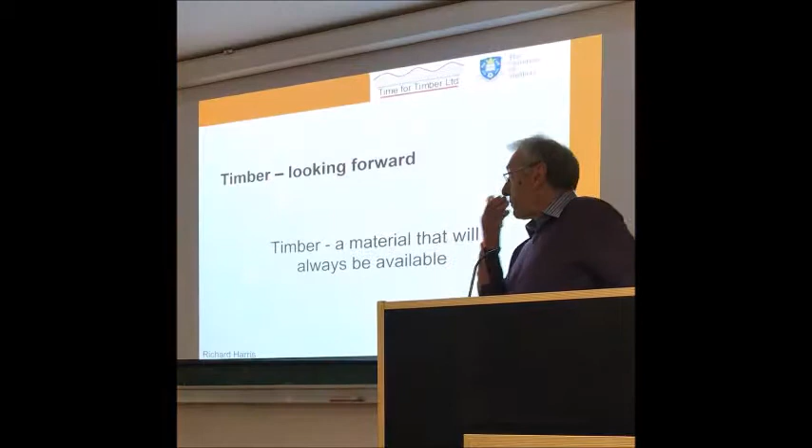So Wen-Shao asked me to put in a few slides to say why timber is such a significant material in construction at this time. I feel it speaks for itself, but Wen-Shao says we must keep reminding people of how wonderful timber is. The first thing I would say is that what's been so good, especially about the last 10 or 15 years of my working life, is that timber is a material that's modern and developing.

If you go back 20, 30 years, people used to think timber was an old-fashioned material to work with, something we used to use in the past. But with so many new products coming into the industry, and because timber is such a sustainable material, it's very much the material of the future.

You'll always hear people saying, well, what do we do when we have used up all the trees? But of course we don't use up all the trees. There's plenty of room to plant more trees. This country is only 10% forested, as compared with Germany that is 35% forested. So even in this country we could plant a lot more trees, and the same is true of other countries.

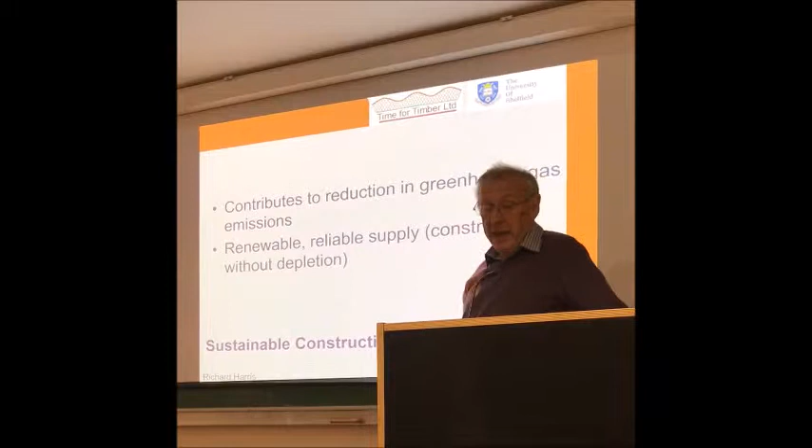So it's a material that is sustainable, because when used from certified sustainable sources, every tree that's taken out of the forest will be replaced by at least one other. So it's a material that will always be available, and being available, it's a material that helps us cut greenhouse gas emissions, because we're not producing huge amounts of carbon dioxide in the manufacturing process.

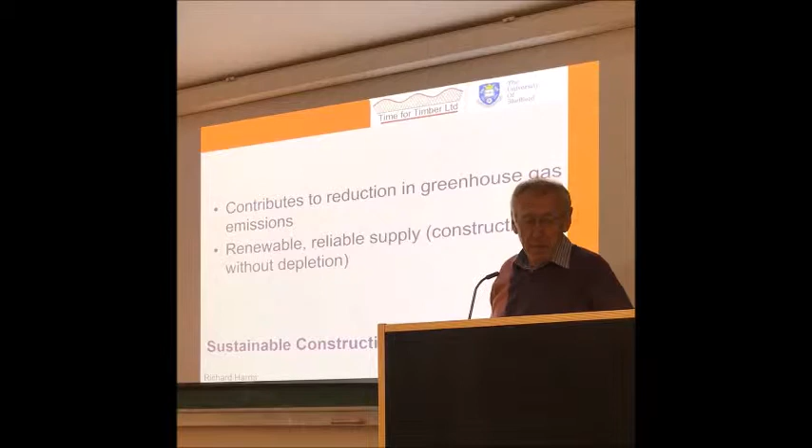There's obviously some emissions in sawing and preparing timber, but as compared with heating up limestone and clay to make concrete, or forging steel out of ore, the emissions are tiny. But even more than that, because it's coming from renewable resources, when working with responsibly sourced timber, we're constructing without depleting the Earth's resources. So we've got the benefit of reduced greenhouse gas emissions, but in addition, we're not depleting what we have.

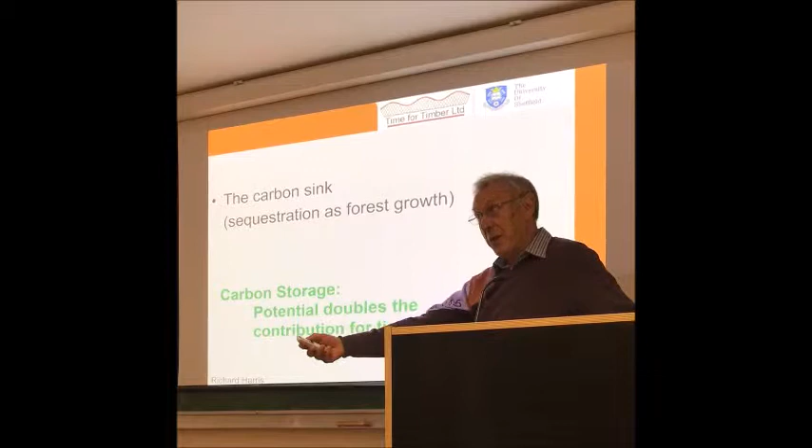So from the point of view of greenhouse gas emissions, there's a double potential with timber. We know that for every tree that we take out to use in construction, if we replace that with another tree, so we create space in the forest and replant, then that tree will continue to take carbon dioxide from the atmosphere and hold it within the forest.

But the tree that we've taken out, we can use in the building, and that in itself becomes a store of carbon, holding the carbon dioxide that it's taken from the atmosphere in its growth, so that we have a double contribution of benefit in terms of carbon dioxide. And it's very simple.

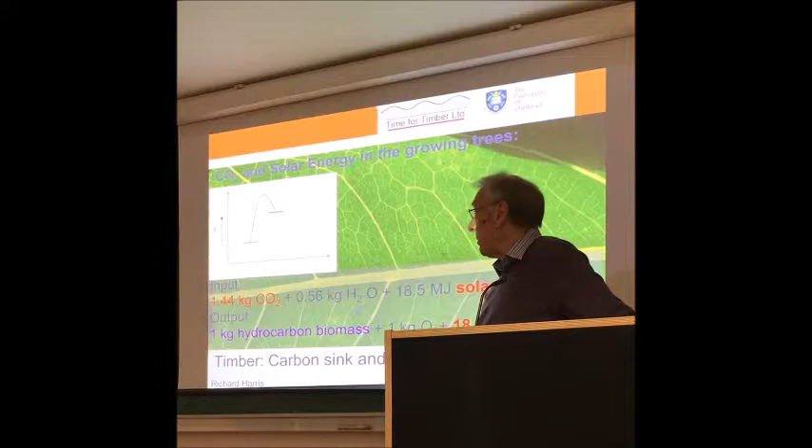In growing trees, the photosynthesis enables carbon dioxide from the atmosphere to be combined with water from the ground with an input of energy from the sun, and we get a complex hydrocarbon, and we release oxygen into the atmosphere, and we have a potential of energy held within the wood as well.

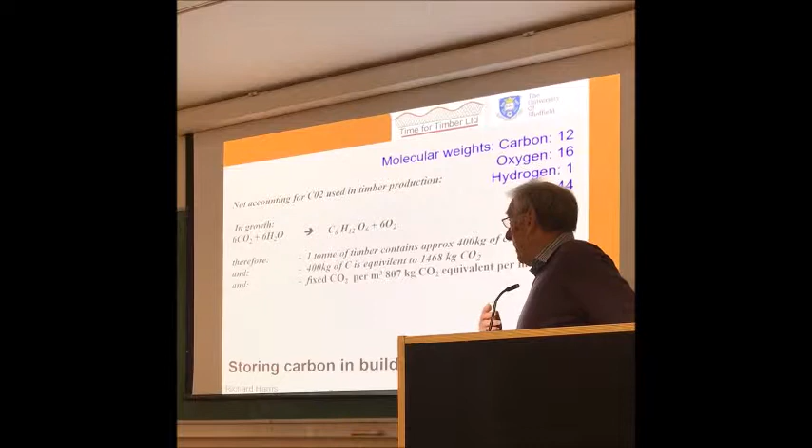I've given these slides to Wen-Shao, so if you want - it's so often quoted that carbon dioxide and water give that complex hydrocarbon and oxygen. This is a simplified expression, but it basically covers the process, and it's frequently quoted that 1 ton of timber fixes 800 kilograms of carbon dioxide.

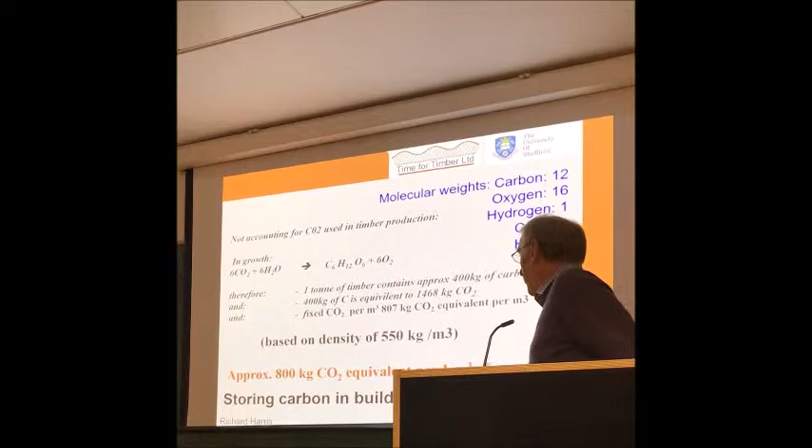But the way to get these figures is - sorry, 1 cubic meter of wood, which is around half a ton of wood, fixes 800 kilograms of carbon dioxide. It's simply a question of balancing this equation with the molecular weights, and you get that answer. It's so frequently quoted, but that's some numbers you can put to it.

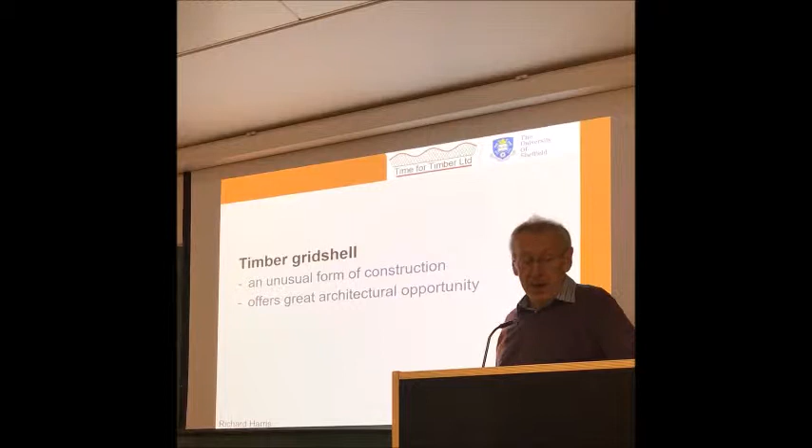And the rest of the lecture, I'm going to talk about a very particular use of wood, which is the timber gridshell. This is an unusual form of construction, but it's a form of construction that can offer you huge creative opportunity architecturally.

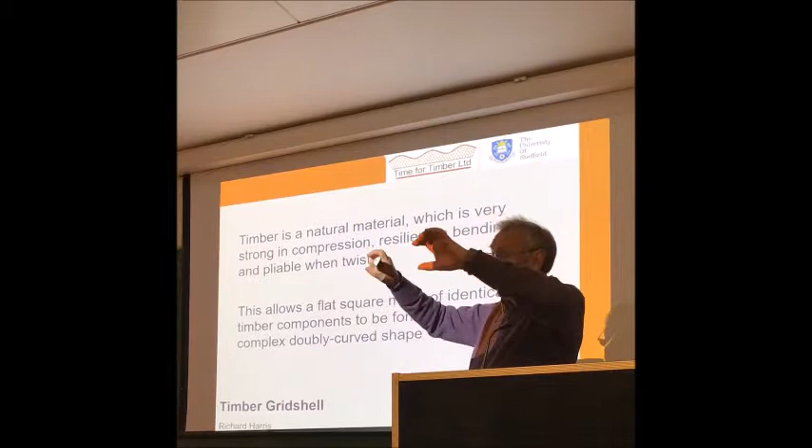Timber's a natural material. What are the properties of timber? It's strong in compression along its length, and resilient in bending, but it's very predictable, and it carries bending loads very effectively.

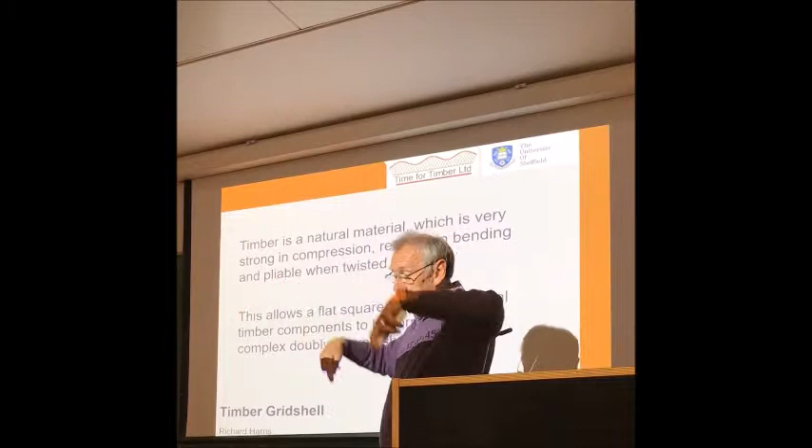But for the timber gridshell, another property that's needed is the fact that when you twist wood, it's actually very weak when you twist it. For timber gridshell construction that's a real opportunity, because it enables you to lay the wood out flat on the ground. If you take one layer and place another layer over the top of it, and hold it in place at the nodes so that it doesn't lose its geometric shape relative to one another, but allow the nodes to rotate, then you can manipulate that flat double layer of timber into a doubly curved shape.

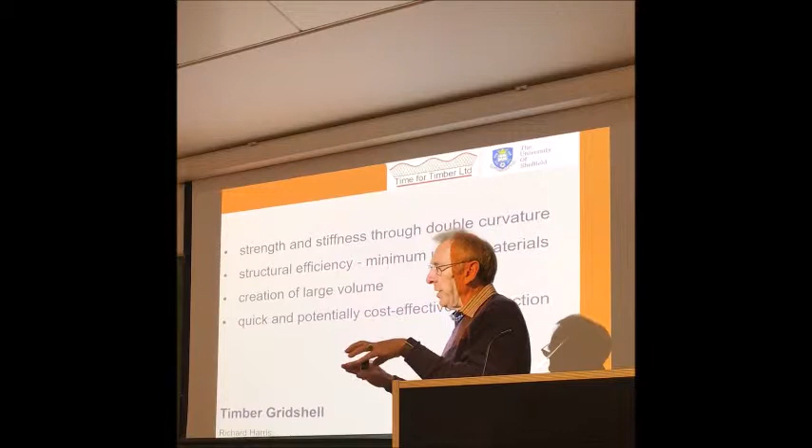Why do you do that? Well, because a doubly curved shape gives you a shell type of structure, which gives strength and stiffness. It allows forces to go through the surface of the wood rather than just work in bending, and that makes it very structurally efficient. You can create big spaces, and using this timber gridshell method, you can do that very quickly, given the complex shapes you're able to create cost effectively.

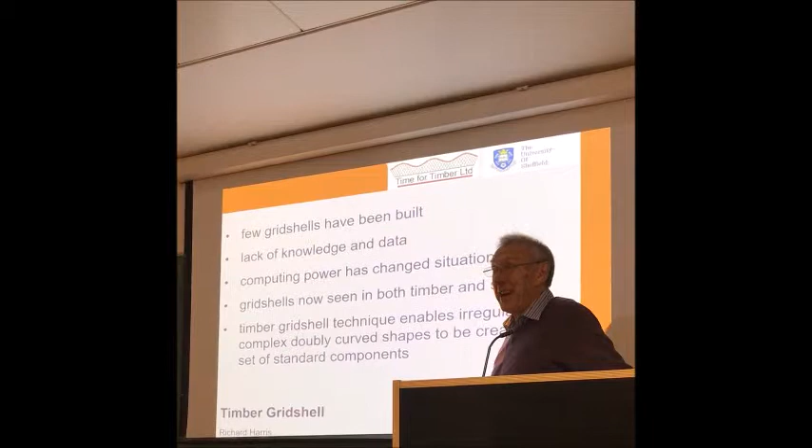Not a great number of grid shells have been built. Why is that? Well, because you have to know something about how to do it, and not so many people know about it. You'll know a lot more about it after this lecture than a lot of other people do. In the past, these structures have been difficult to analyse structurally, but now that's not such an issue because computer power is readily available.

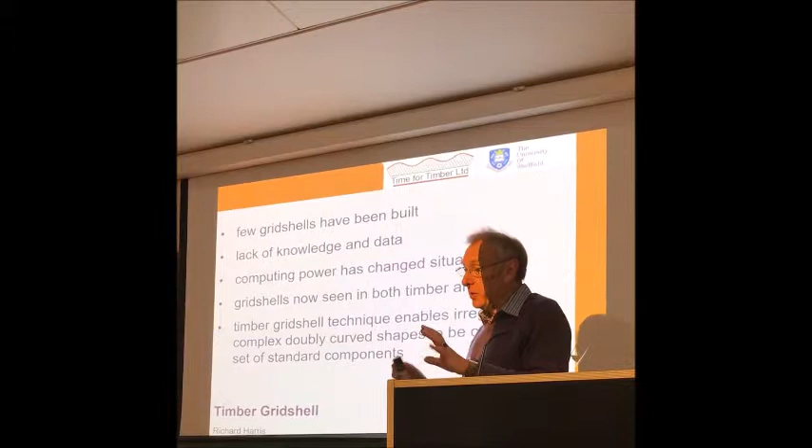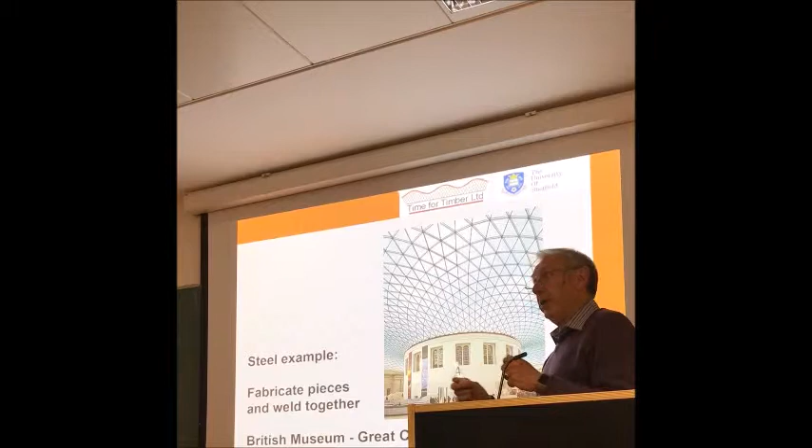So the way steel grid shells are made is to fabricate all the pieces and weld them together. You put up scaffolding and build it in situ. This proves that it can be done, but it's complex. It needs very sophisticated fabrication methods and is extremely expensive.

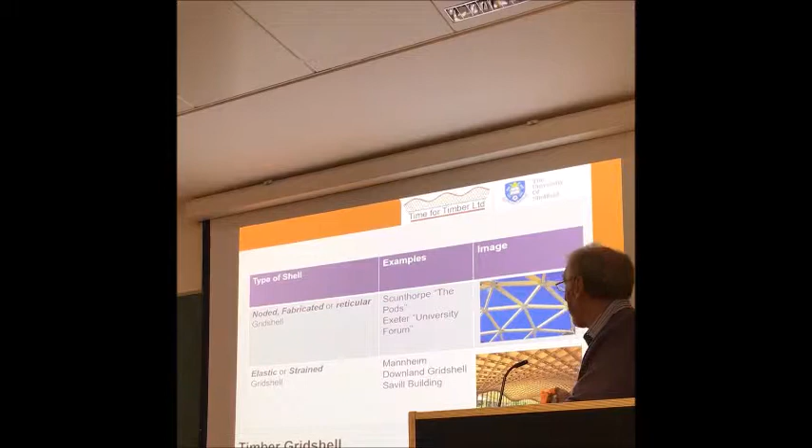The timber grid shell can be made in that way too, and you can certainly make a timber grid shell structure by putting up scaffolding and building it up node by node progressively. It can be done very easily.

This swimming pool structure in Scunthorpe was done with a minimal number of props, just progressively building the shell out into space, but it was still needed to be propped and needed to be put in piece by piece.

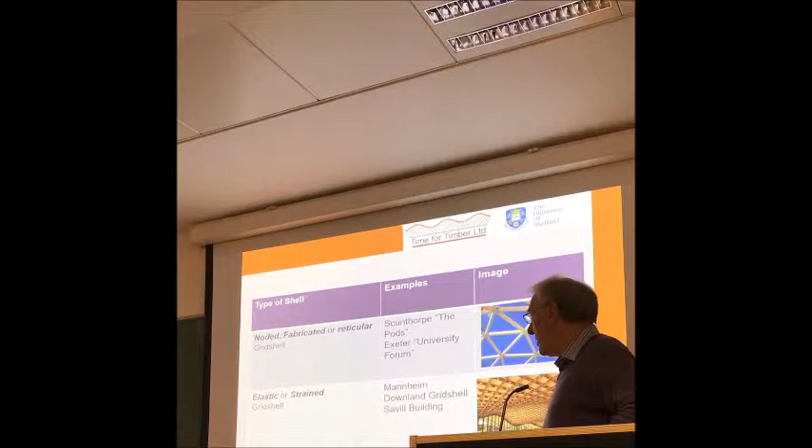What I'm presenting here today is what's often called an elastic or a strained grid shell, where you make a flat mat and then manipulate it into space. So all the pieces are standard pieces.

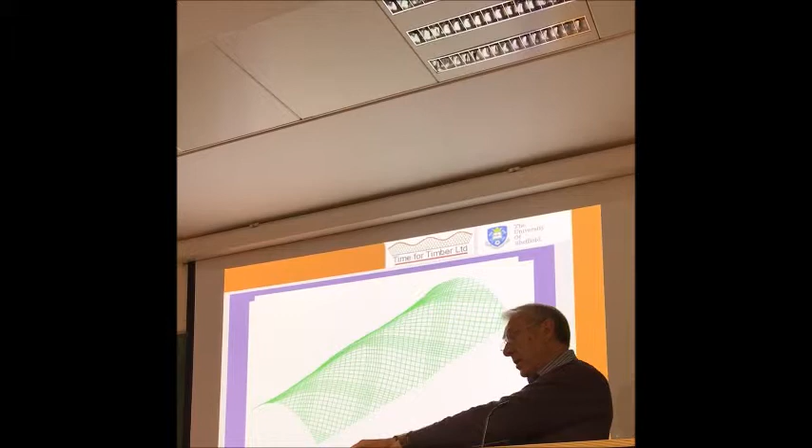Here's the flat mat, and because the nodes can rotate, it starts flat on the ground and is progressively bent into shape by changing its support. In doing that, the nodes rotate into a diamond shape from square into diamond, and the timber twists over the surface, until eventually you have a complex doubly curved shape from a set of standard components.

The first structure of any size to be built like this—there were a few preliminary structures before the Mannheim structure as prototypes—but the Mannheim Garden Festival grid shell was the first and is still the largest timber grid shell to be built.

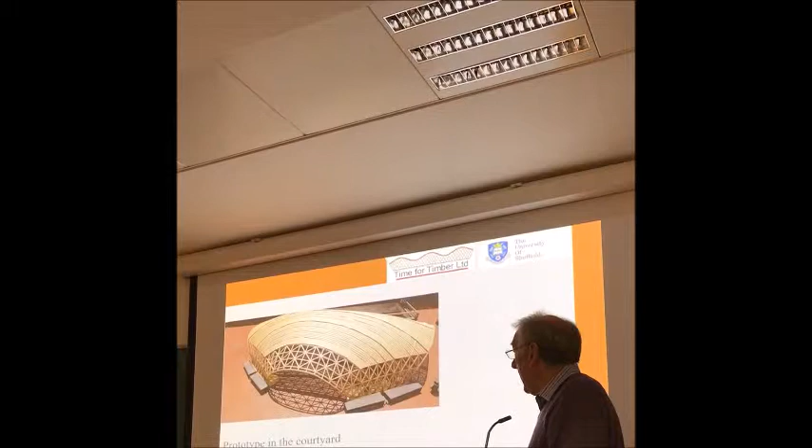After that, a number of others were built, examples given here. More recently, in the last 5 years or so, this has become more and more popular with architectural departments for making small prototype shells, because the components are very easy to prepare, and architectural departments often have a considerable amount of manpower in the form of students.

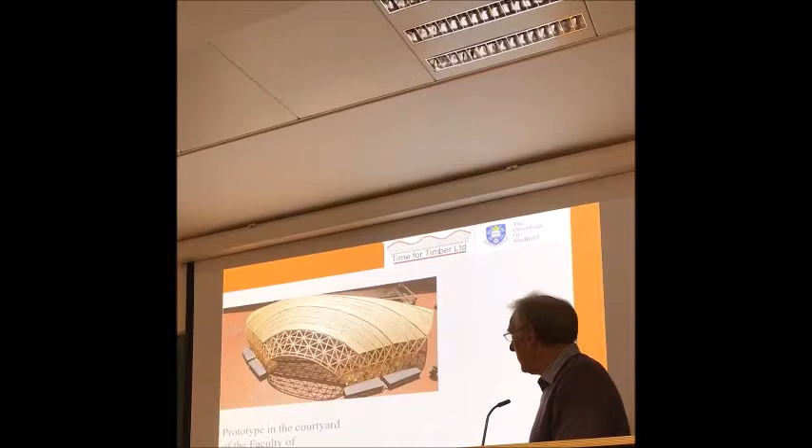This is an example from Naples, from an architecture department, where they built a small gridshell at the university. And this is another one.

When I was working at the University of Bath, Dragos Naicu from Romania made contact with other people, particularly Romanian people, but also people from Denmark, and they set up a workshop in Cluj in Romania, and they built a pavilion. As part of that project, the output was published in the World Timber Engineering Conference paper, and I just thought this was an interesting table that was in that paper.

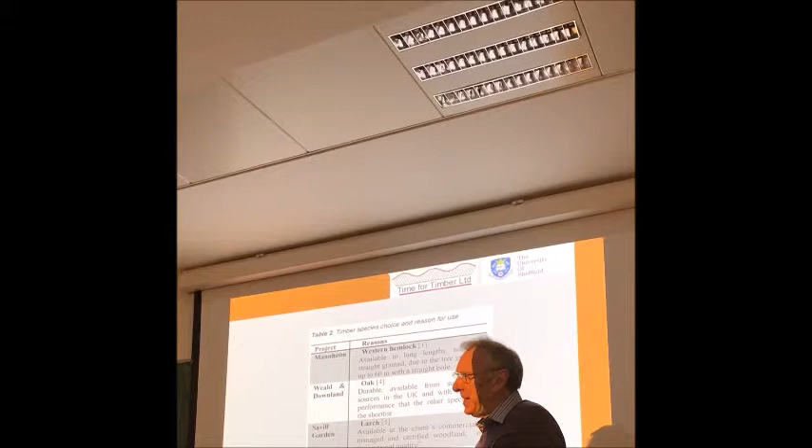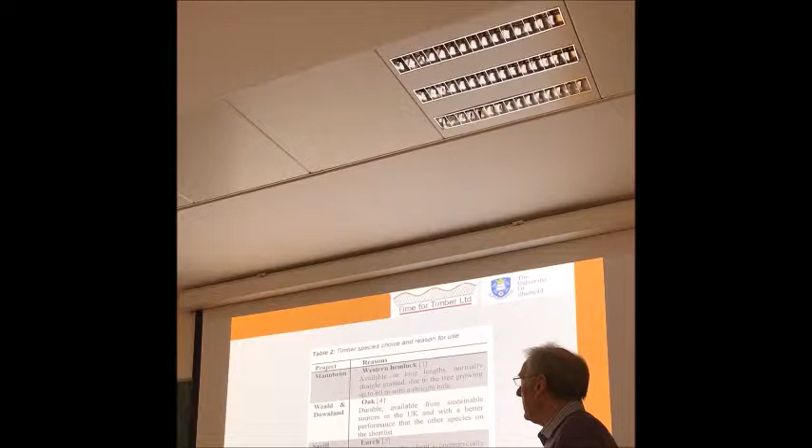Although all these structures are made of wood, there are many species of wood, and that's one of the rich things about using wood - there's more variety and variability in wood than there is in concrete and steel. In Romania, they used larch because we'd already used larch on a building in the UK which I'll be showing you more of. But previous gridshells used oak, a particularly resilient timber. And in Mannheim they used hemlock because it's very straight-grained, although I would say it's quite a brittle timber, so probably not the best for gridshells.

So the first large-scale timber structure was the Mannheim Garden Festival gridshell, designed by the German architect-engineer Frei Otto, who is probably more famous for the Munich Olympics Stadium, now used by Munich Football Club. It's recently been refurbished. But his specialist area of work was tensile structures.

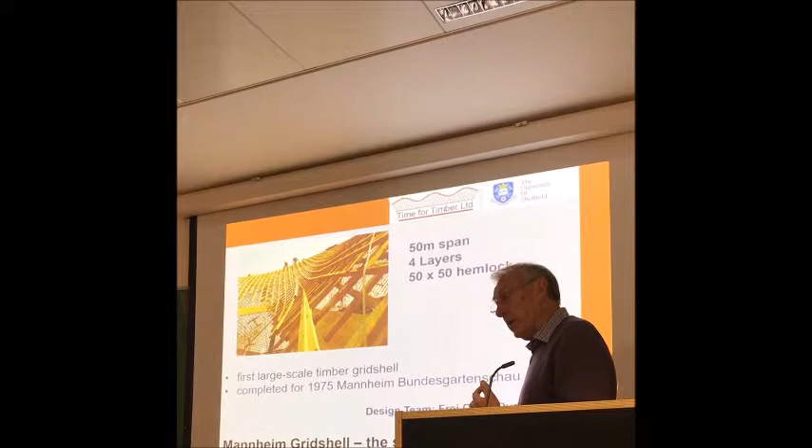He worked a lot with models. He would make models, and those would be the basis of what he'd use to win a competition, then work with engineers to turn them into real structures. This is a huge structure, and there really was nothing like it before, and there's nothing as big as it since. He searched - he started with a hanging chain model.

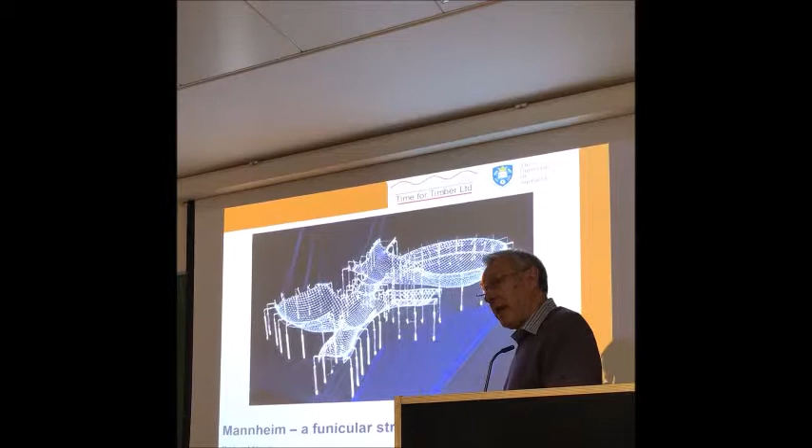If you invert a hanging chain model, it has to be completely in tension - all the members have to be completely in tension, otherwise the chain wouldn't hang. So a hanging chain model is a structure that's 100% in tension. If you invert it, you get a structure that's 100% in compression under the self-weight of the structure.

Actually for wood, the self-weight - this is a fantastic technique to use for a masonry structure, but it's a way of getting a geometry in timber that is not as vital, because timber is a lightweight material, so actually the forces on a timber structure are more significantly from wind and snow than from the self-weight of the structure. But it's an interesting way to get a structural form.

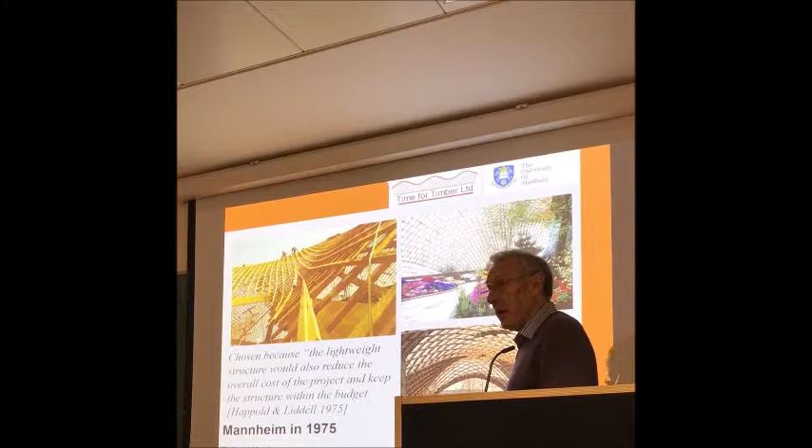He then needed to search the world for an engineer who could help him realize this structure, and he found Ted Happold, who at that time worked for Arup in London. With the team at Arup, this building was realized in 1975 - really an extraordinary building with some very interesting details, which actually derive to a large extent from the sorts of details he used on tensile structures.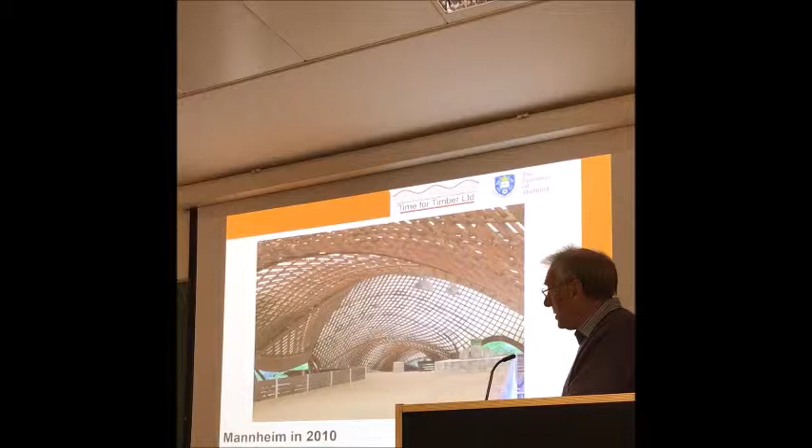And the building is still standing. It was built as a temporary structure but was so successful that it's never been taken down. As a temporary structure, the weatherproofing is not terribly great, and it has suffered deterioration over the years. But there's a strong move to refurbish this structure by engineers, particularly in Germany.

This paper for The Structural Engineer, written by Ted Happold with Ian Liddell, is a very detailed engineering account of the structure, and it is a very important paper, I would say, in the development of timber gridshells.

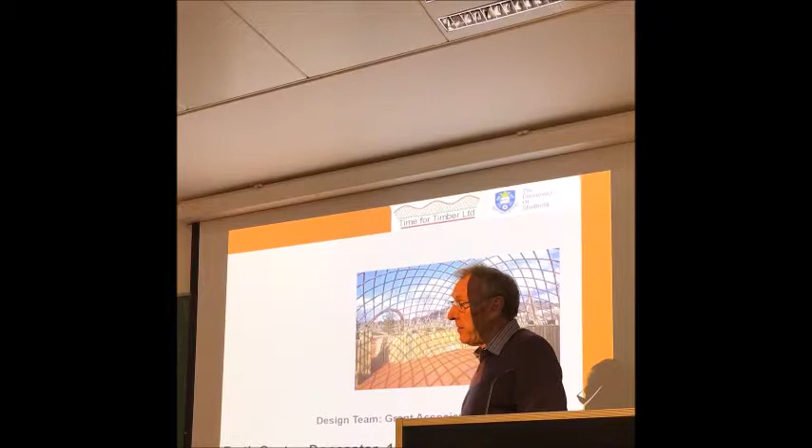Ted Happold left Arup in 1975 and started his own company called Buro Happold, in Bath, and the team he took with him were essentially the team who had worked on the Mannheim timber gridshell. So the office in Bath, the company Buro Happold, actually became the repository for all the engineering knowledge that there was on timber gridshells.

Ted Happold died in the mid-1990s, 20 years after Mannheim, but there was always a strong desire to take that knowledge and use it on the right project to create another gridshell. The first opportunity came with these little tiny structures built near Doncaster for a Millennium project. They're landscape structures, very simple, but it was a new opportunity to build some real prototype structures - very small, a tenth of the span of Mannheim, but using similar techniques.

A lot of the details are very similar to the Mannheim structure, only with 2 layers of wood - what I would call a single layer gridshell. I'll talk more about that as we go on, the layering of gridshells.

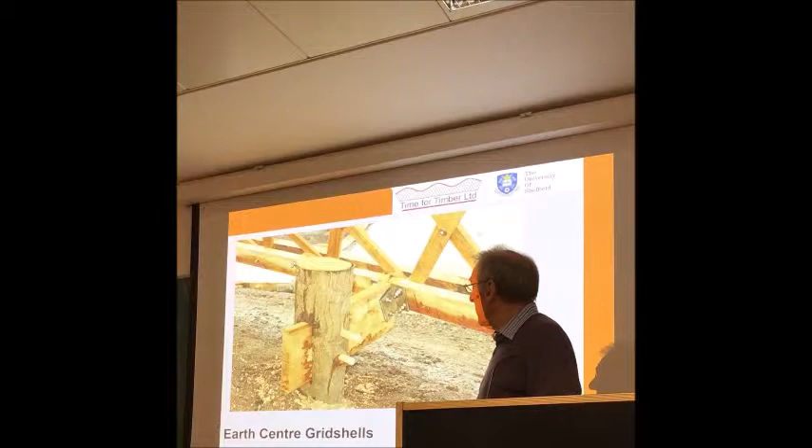Although very small, a lot of the details were taken straight from Mannheim, and they were actually extremely successful. Through building these, it really architecturally created a big impression, because nobody had seen structures like this for a very long time, and it really rekindled the imagination.

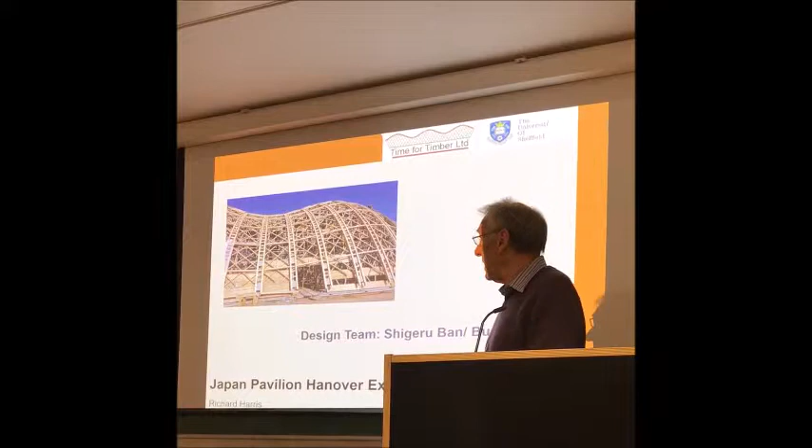At the same time, for the Hanover World Expo in the year 2000, Shigeru Ban had the idea of building a grid shell. The theme for Hanover Expo 2000 was sustainability, and of course Shigeru Ban is known for his paper structures. He wanted to build a very lightweight, completely demountable structure, something that could be put up quickly and taken down with all the components capable of being recycled.

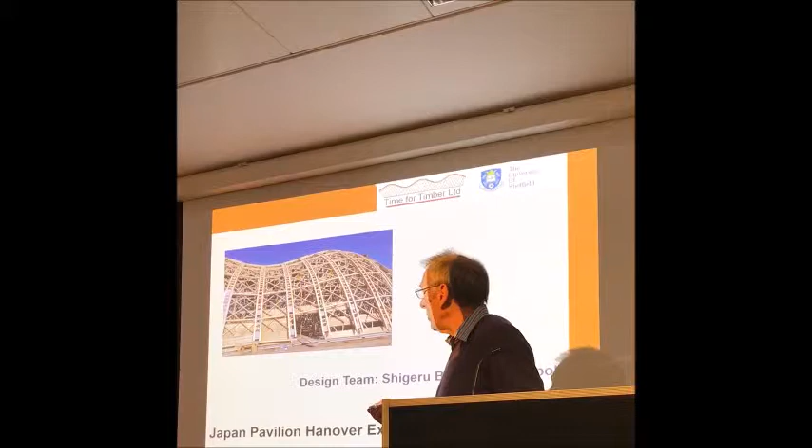So even the foundations were simply boxes of sand held between scaffold boards, so the whole thing could just be taken down, absolutely minimal impact on its surroundings. Once again, a single layer gridshell, two pieces of two cardboard tubes, and the support shared between the gridshell and these glulam ladder arches. Just simple ties for the nodes. Really a fantastically successful piece of architectural design.

This is the finished building, which had an incredible visual impact. But what this then did was show people a large scale gridshell structure, and because it was built in 2000, 25 years after the Mannheim structure, it had to be built following modern health and safety methods and within modern financial constraints. So the construction techniques developed for this building actually moved the whole opportunity for building gridshell structures on a long way.

At exactly the same time, and in parallel with the Japan Pavilion gridshell, Buro Happold were commissioned by the Weald and Downland Open Air Museum, near Chichester on the south coast of England, a museum of historic buildings where they rescue and re-erect buildings from various places in the south east of England within the museum. And because they refurbish the buildings before they re-erect them, they actually need a workshop.

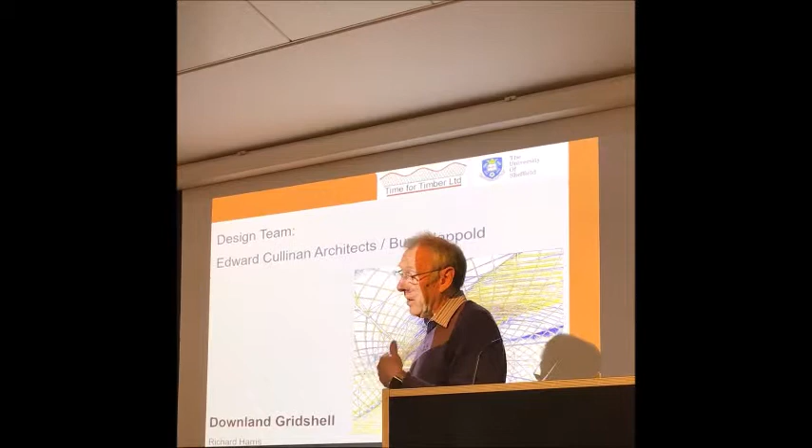The very common thing to do in museums like this is actually to use historic techniques to build an oak frame workshop. That would be the sort of obvious thing to do, but the director of the museum said such a building is just a pastiche, and I want a really modern building. What's more, I want a modern building that's not like anything else in the country.

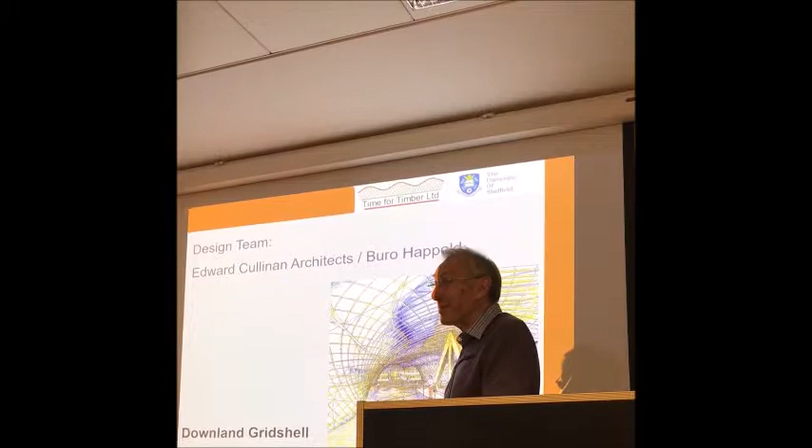Edward Cullinan Architects picked up on this and picked up on Buro Happold saying we should do a gridshell, whispering in his ear all the time. Over a period of a few design workshops, the concept for a timber gridshell workshop came up.

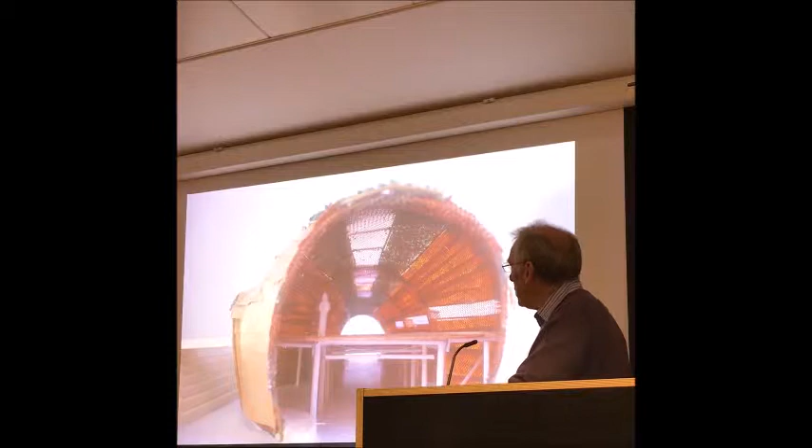Not as big as Mannheim, sort of similar size to the Japan Pavilion, and a very similar shape to the Japan Pavilion. This woven mesh, made really for fly screens to go over windows, mosquito screens, is a wonderful material for modelling gridshells, because it does exactly the same thing as a timber gridshell. Because it's woven, the nodes will rotate and you can manipulate it into a doubly curved shape.

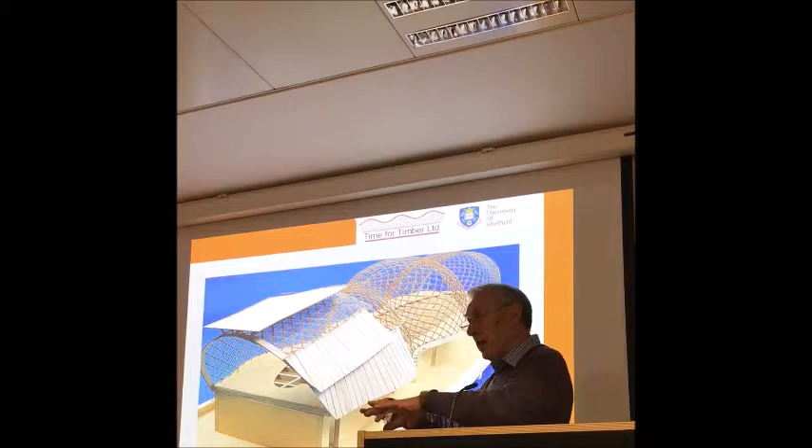And it was very, very quick. We had a school student actually working doing work experience for us in the office in Bath, and he attended the first workshop and spent a week and built this model, which really does very closely represent what the building came to be. We spent a lot more time to very carefully make this bigger model using strips of wood actually bolted together at the nodes, really as a way of rediscovering the sort of feel for how a timber gridshell moves into shape.

This was actually made by two more students on work experience, two students from Canada, made in the Buro Happold workshop. We made it very, very carefully, scaling the pieces of wood precisely according to their stiffness, and made it just big enough to go in the car of the partner who was working with us on this project, who had a great big Mercedes estate car. We scaled the model to be just the size that would fit in the boot of his car, so that we could then take it to the client, who then drove it around the country to raise money for his project. Hugely successful, and at the end of the project he bought this model, and it's still on display at the museum.

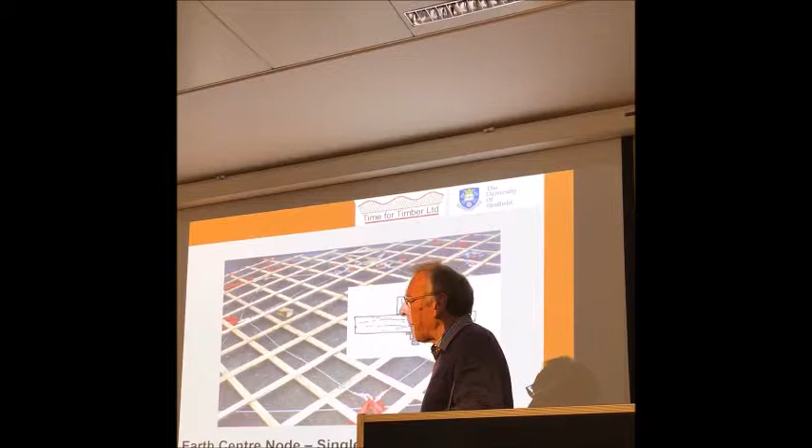So let's talk a bit more about the engineering detail of a timber gridshell. I know this is engineering, but I hope that even though it's a sort of engineering detail, you'll be interested in this, because it is the crux of why the timber gridshell is as it is.

Here's the Earth Centre gridshell, just a very simple two-layer structure, what I would call a single-layer gridshell. This can be bent into shape, and the node can be fixed because it just has to rotate.

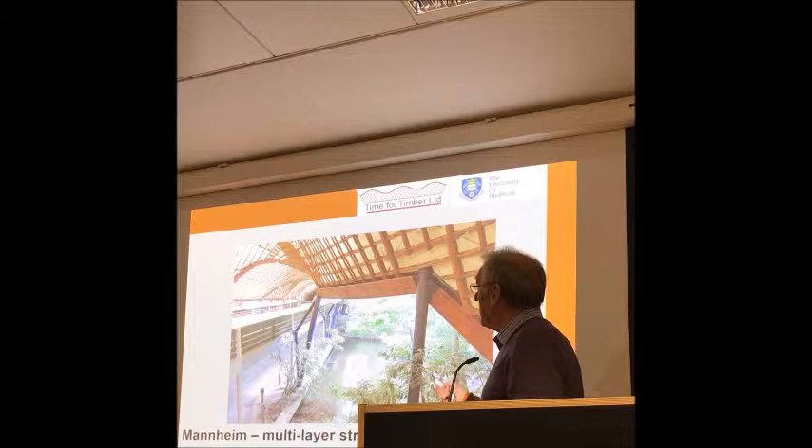The Mannheim grid shell has two layers going that way, and then another two layers on top of that. So I would call that a double layer grid shell. It's got 4 layers of wood, but 2 layers going in one direction, 2 layers going the other direction.

Why does it do that? Well, those 2 layers of wood, after they're manipulated into shape, are then locked together with a shear block, so that the 2 layers going in the same direction work together.

And here is the Weald and Downland grid shell. Those timbers that lock the layers together are fitted in after it's bent into shape. So here it is just after it's been bent into shape, but no shear blocks in place.

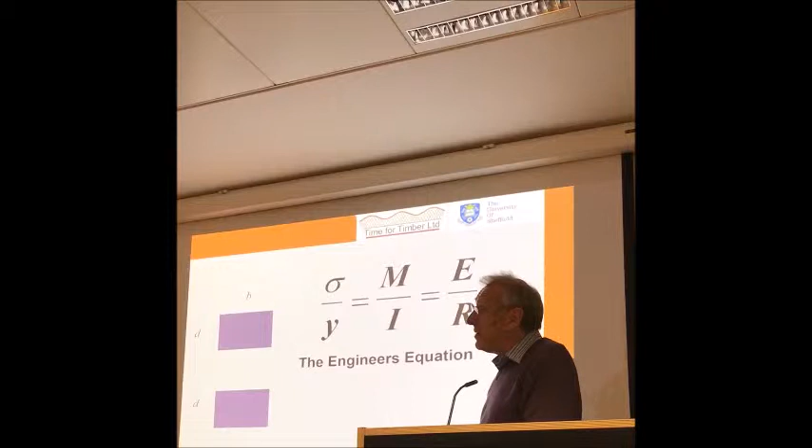The dilemma with making a timber grid shell is that you want the timber to be flexible enough to bend, but stiff enough to resist the forces applied to it. This little equation, which is a very simple little equation, actually solves practically every structural engineering problem there is to solve. Really, if a structural engineer knows this equation and understands it, they don't really need anything else. Structural engineering is a very simple discipline. Everything is in this equation.

That's the bending moment, in other words, the applied force to the structure. These are geometric properties - this is the moment of inertia, or second moment of area. This is the depth of the member, and this is the material property. This is the stiffness, the Young's modulus, and these two, the sigma is the stress that you get when you apply the bending moment as a result of it bending into a certain radius of curvature. So really everything that an engineer needs is in this one equation.

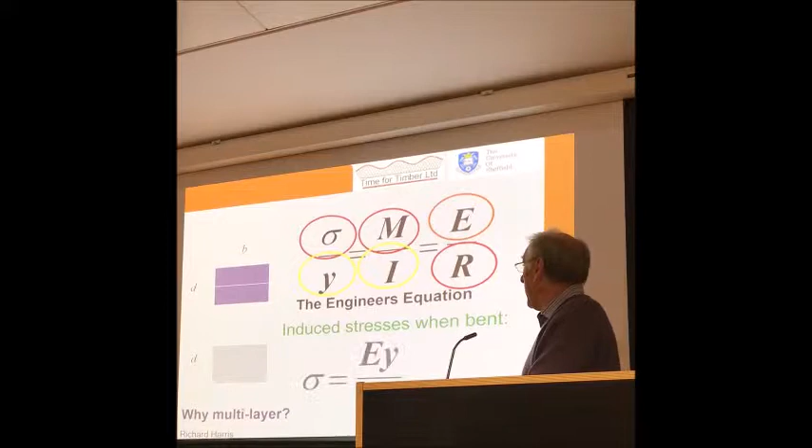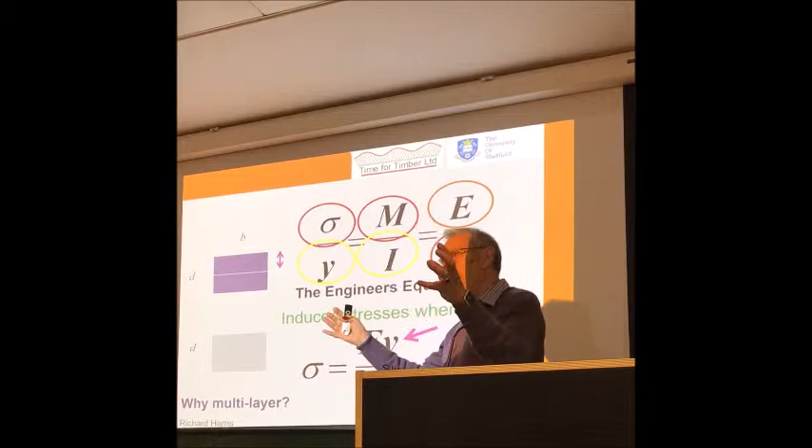So that's the stress, and the important thing to note here is that if you bend a piece of wood, then the stress that you get in that piece of wood is dependent on the distance from the middle of the wood to its extreme fibre. To bend it to a certain shape, so we're making a structure, we're not bending it to a stress, we're bending it until it's curved into a particular shape. R is that shape, so when we've bent it, then R is what we've defined, what we want it to be, the radius of that curvature.

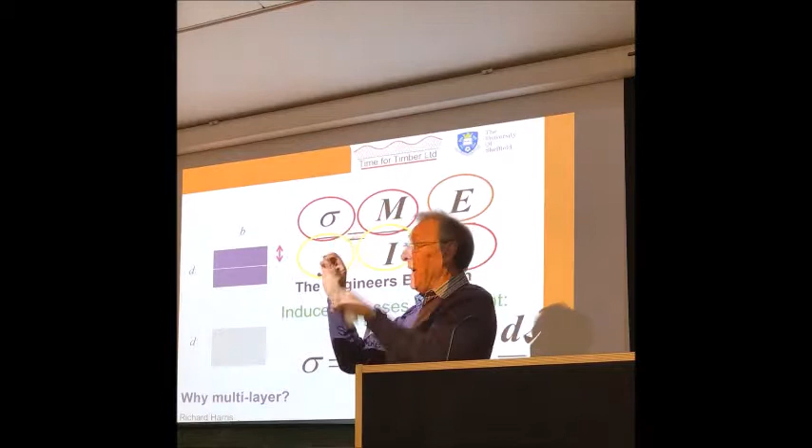So the bigger the distance from the centre of the piece of wood to the extreme fibre, the higher the stress. So to bend a piece of wood into a particular shape, we want that piece of wood to be as small as possible, because then that stress will be low. So if we take a piece of wood this thick and try and bend it into that shape, we'll have a huge stress - it'll take a huge force. If it's that thick, I could do it here with my hands. So that distance there, when bending the shell into shape, wants to be as small as possible.

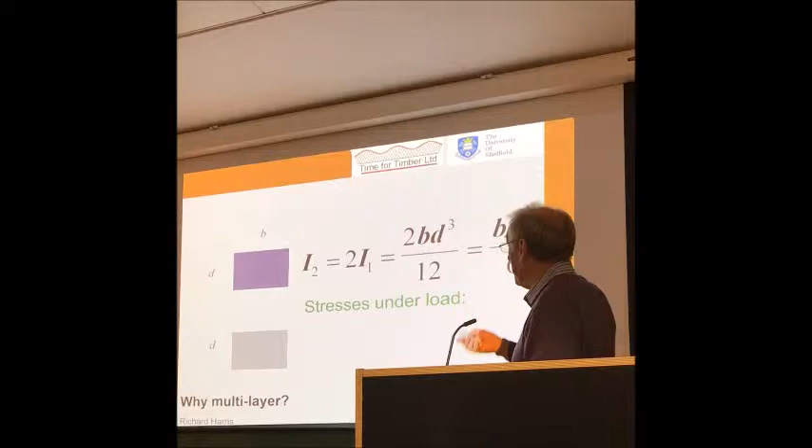On the other hand, when we apply a load to the wood, when it's in use, then we want that stress that we get to be as low as possible. And the stress that we get when we bend it is a property of this value called the second moment of area, which we work out from the width of the wood and the depth of the wood. So we're back to the depth of the wood, and the stresses under load can, from that first formula, be shown here. So the higher the second moment of area, the lower the stress. So here we want these values to be as big as possible.

So how do we get a situation where the wood is flexible - in other words its depth is shallow to bend it into place - but deep when it is bent into place? Well, we split it into two halves and bend it with a shallow depth, in fact two shallow depths, and then we lock those two depths together and we get a bigger depth.

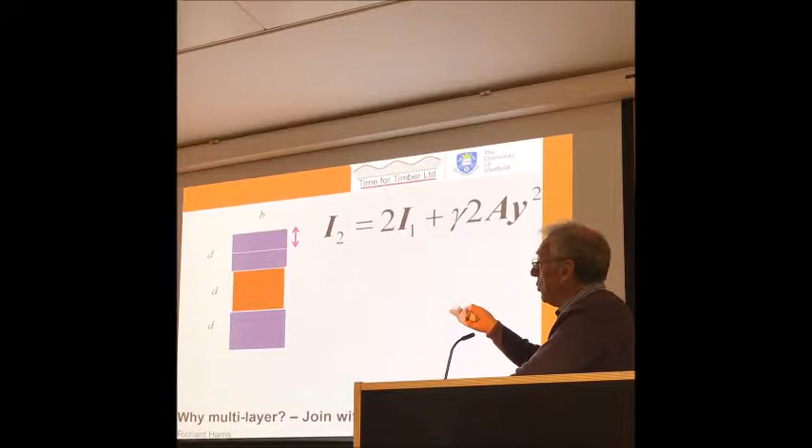Here we are, here's the two pieces of wood that we bend into shape with a shallow depth, and then we lock them together, so there's the depth of the wood when it's being bent into shape, and there's the depth of the wood after it's been bent into shape and locked together with the shear block.

And by doing that, by locking them together, we get a second moment of area, a strength essentially, of timber that's 13 times bigger than the two pieces on their own, just by putting that shear block in. We get composite action.

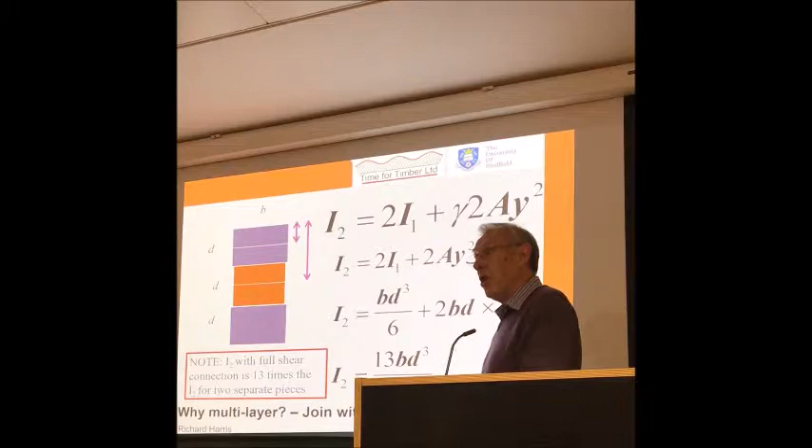So that's really the key to the timber grid shell. When used in any sort of scale, we bend it with single layers and then lock it together after it's bent into shape to get a thicker layer.

These drawings are 20 years old now, but this was the very early days of having graphical output from computer analysis, and we could do the analysis of the bent form.

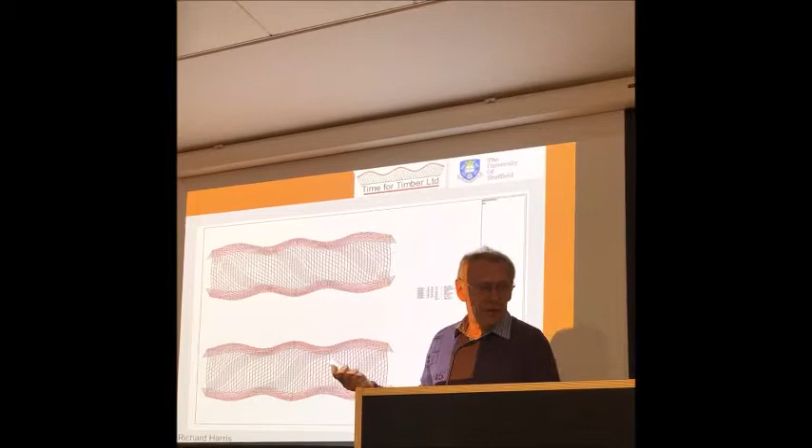And we're not recording, so if it keeps crackling, I'll turn it off and speak up. Still crackling, even though I've turned it off. Never mind.

Knowing what the shape is going to be from the flat mat is hugely beneficial in construction. I haven't got time to talk about all the detail of that.

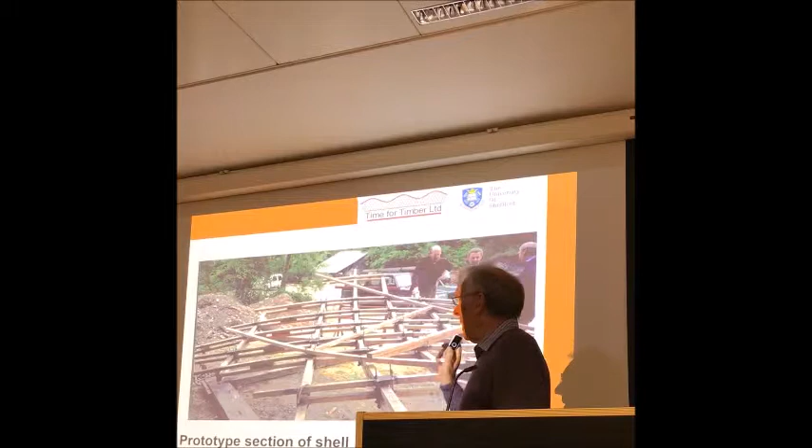This is probably more important to mention. I think this was something I learned working in Buro Happold. Buro Happold did a lot of innovation in structural engineering. Ted Happold had enormous confidence in the ability of himself and the people he worked with to do things that had never been done before.

Something that I was taught in Buro Happold was that when you're doing something very innovative, you have to gain the confidence of the team that you're working with. You have to gain the confidence of the client, the architect, the cost consultant, but more than anything, you have to gain the confidence of the constructor, the person who's going to build it.

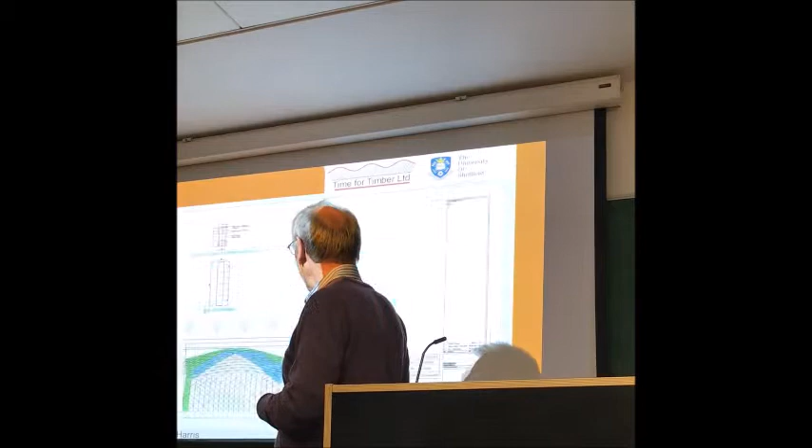So here I am, 20 years ago, with the two carpenters, and what we've done is ask the carpenters to make the piece of grid shell that is curved more than any other part of the whole structure. Because when they looked at these drawings, they thought, well, can you really bend it to that radius of curvature?

Well, by making a full-size piece of it, here's Steve Corbett with his boss Andrew Holloway, and Steve's saying, what, you're not going to bend it any more than that? That was easy. And from that point, they were our best allies for the project.

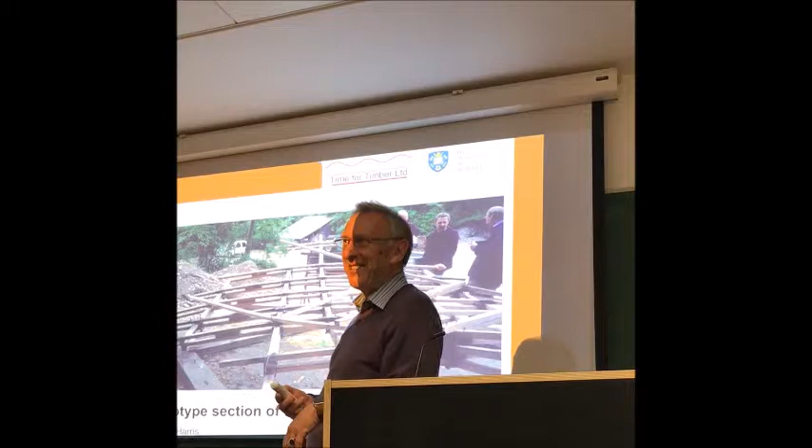And it happened, I did the same with concrete on another project, where it was a very complex precast concrete element, and we got the contractor to make it and erect it just as a single frame. And once he'd done it, he said, well, that's easy, of course we can do it. I think it's really worth emphasising: get the contractor on your side when you're doing something innovative.

Timber only grows a certain length. Why can you bend a timber grid shell into a complex doubly curved shape? Well, because the wood is sufficiently flexible.

To bend to that shape, we made some very long pieces of wood using automated finger jointing methods. Then, since you can't transport a piece of wood 30, 40, 50 meters long, they're brought to site, and very simple traditional scarfing methods are used to join them together. So we're making long lengths of wood using glued joints.

There's the workshop. In Mannheim, the erection pushed the shell up using a forklift, a really not a terribly safe procedure actually. What the Downland development did was introduce a scaffolding system with an adjustable prop using a PERI system. PERI is actually a formwork propping system, and it has a very long adjustable prop.

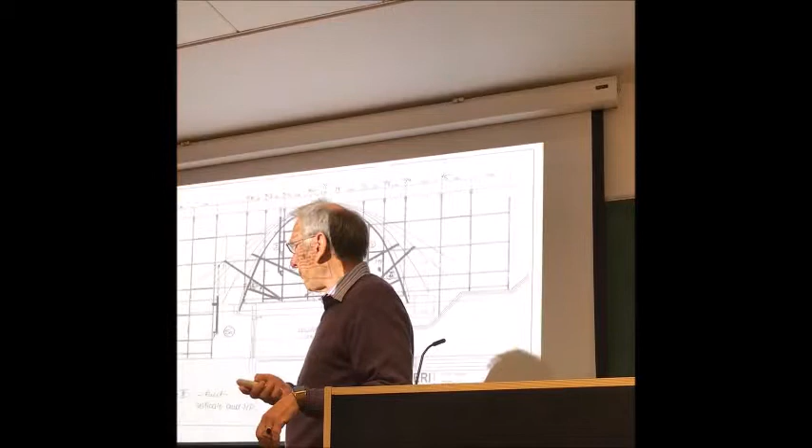Here's the Downland grid shell construction sequence as set out by the PERI Scaffolding Company. It's a proprietary scaffold system, so the carpenters could actually move the scaffolding around, and it's a very carefully worked out procedure, in this case using gravity - putting the scaffolding, setting it out high up, and then using the adjustable props to gradually, in a predetermined way, adjust the props so that the shell then moved into a curved shape. Gravity just took it there.

Needed a little bit of help sometimes to just ease the diamonds together, but essentially there's the scaffolding going up, here's the long pieces of wood being carried out. The carpenters, here's a nice practical thing.

In carrying the timbers out, they marked a line on the ground which was a tighter curvature than any point in the structure. So every piece of wood, just as it was being carried out to the site, actually got proof tested.

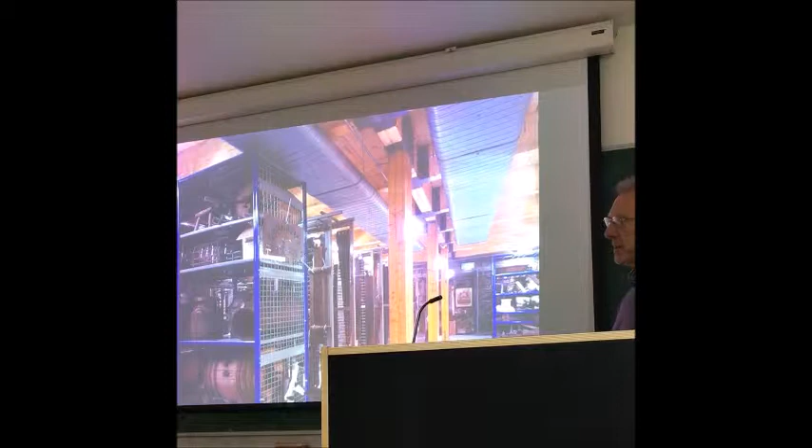But if it can be properly programmed in, the client didn't actually mind how long it took to build this building, and I don't think that's necessarily so unusual. It did want to know more or less how long it was going to take. I think clients hate being let down when halfway through a project they're suddenly told it's going to take years longer. This construction process just to build the shell took 3 or 4 months, which is quite a long time to make.

But the museum was open, the museum had visitors coming, and they were watching the construction process, and everybody was enjoying it. It's clad with wood, polycarbonate windows, and there's the finished workshop. And even though the construction period is long - here's the grid shell forming - it's 3 or 4 months.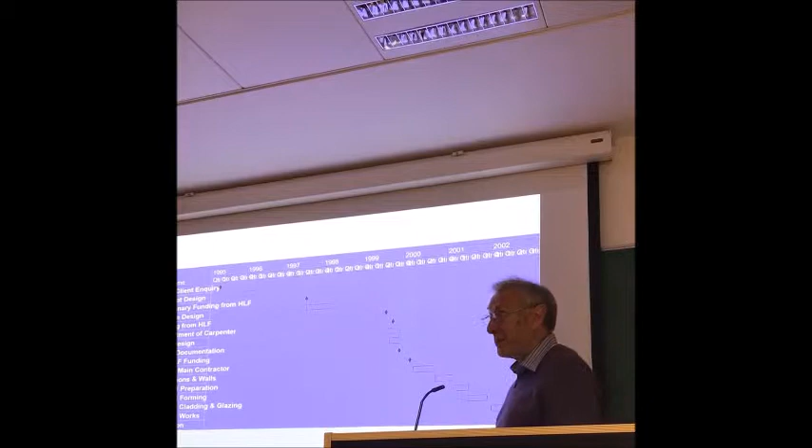Actually, in terms of the whole project, by far the longest part is the preliminary part. The idea was in 1995. We got some initial funding from the Heritage Lottery in 1997 to develop the design. So this period is fundraising, getting people interested in it - a short period doing the scheme design, then raising more money, then appointing the contractor. So it's 1, 2, 3, 4, 5 years prior to starting construction. What's it really matter that it takes 3 months to build the shell, providing you know it's going to take 3 months? I don't think that's an unusual program for a project, actually. There's been many papers written on this.

So now, having built the Downland Gridshell, we can offer this as a solution to clients who otherwise wouldn't be open to such an innovative structure. The client on the Savill building is the Crown Estates, who run the Queen's property portfolio, a very conservative client. Most of their buildings are office blocks in London. So they would not have taken kindly to Wen-Shao's competition winning entry if we couldn't point to a building already constructed using the technique.

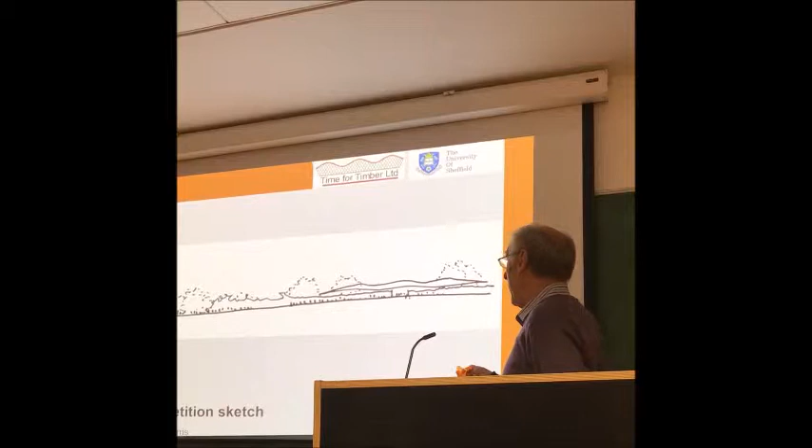Here's Wen-Shao's competition winning sketch, which shows an axis through Windsor Great Park and a floating curved shell structure. It virtually shows everything that there is in the building, I would say. I think it's a very impressive sketch, probably initially done on a napkin at a dinner with an engineering colleague of mine. But this is building up that sketch into something a little bit more elaborate - very early engineering ideas of how it would work out.

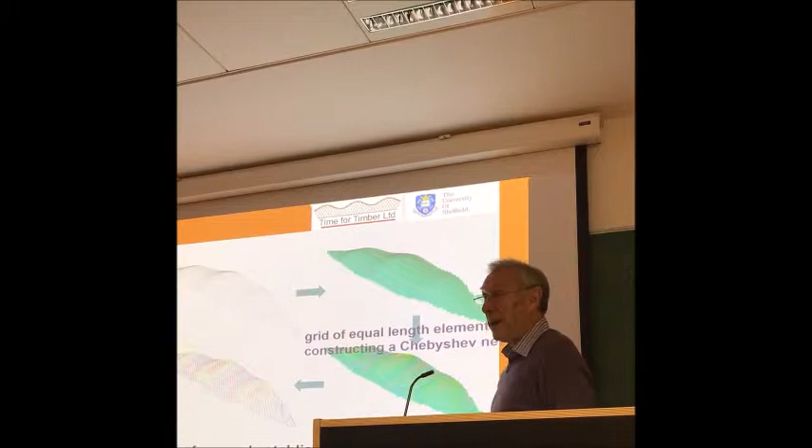We decided to use larch because... okay, let's talk about this quickly. The way that I think has become the standard way - there are variations on this, but the standard way for creating, you have to know what you're able to bend the timber to, what creates an effective structural solution. Essentially you agree between the architect and the engineer a geometric surface, and once you have that surface, you can lay a grid onto it. Once you've laid a grid onto the surface, you can analyze that, and having analyzed it, you can then specify the whole structure - that's essentially how it's done.

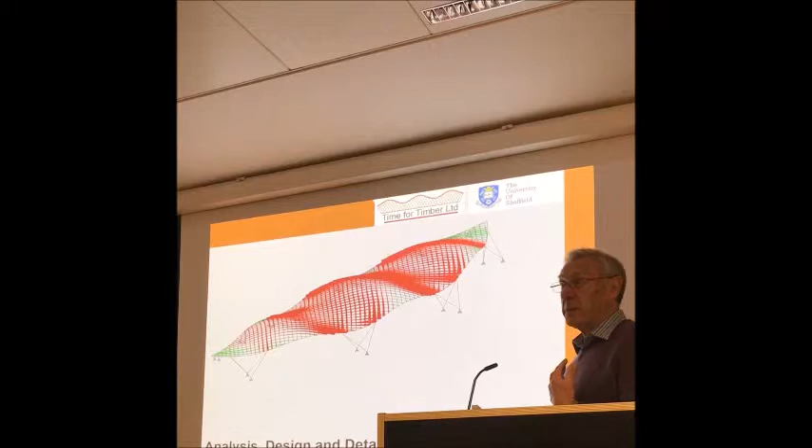And in the analysis, it's hard to do a lot of development. The tricky thing is that you have to get the form right at the start. You have to use quite a lot of engineering judgment to get the form right, because there's such a lot of work in doing the analysis, and the shell is so much part of the architecture that it's hard to make changes. So there's a lot of experience and judgment that goes into it, which is maybe why there aren't so many of these things built. But structurally, what one has is some stiff domes with this form of structure, with some tensile areas that hang between those stiff compression areas.

There's some very nice development of the structural details on this building, which were done with the carpenter, who fortunately was the same carpenter that we worked with at the Downland Gridshell - so a carpenter who really knew what they were doing.

Why was it made of larch? Well, because Windsor Great Park has an FSC sustainably certified woodland with magnificent larch trees in it - very, very fine quality wood available from almost within sight of the building.

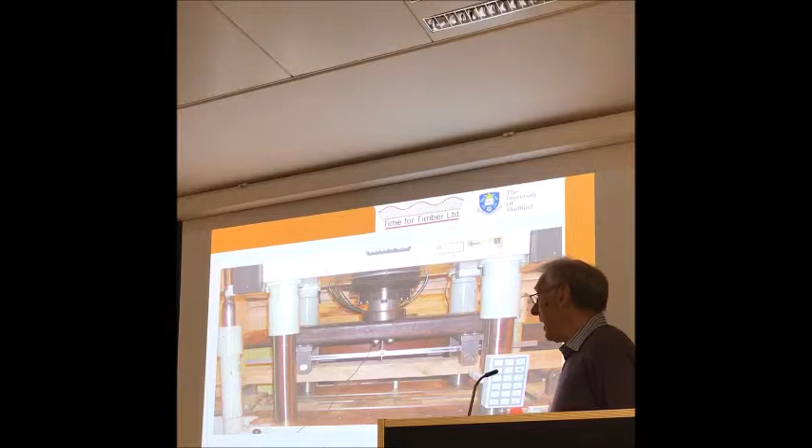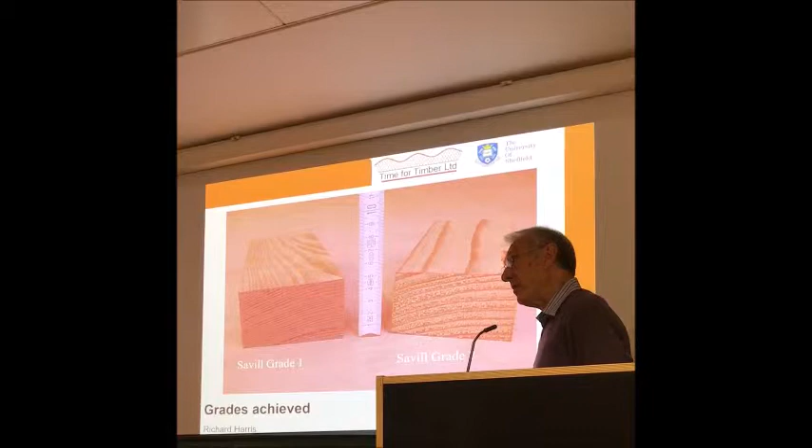Because we were using timber from the local woodland, and we knew exactly where it was coming from, we could test it, and rather than give it a structural class taken from the codes, we could give it our own class - Savill Grade 1 and Savill Grade 2 - and describe it. Having tested it and done statistics on the results, we could say this is graded wood, and we know how strong it is. We were able to use it very effectively, essentially using the better quality wood for the long timbers and the lower quality wood for the shear blocks where the stress was lower.

We did prototyping again. In this case we had the same contractor, and it was more to give confidence to the client and to show them what they were going to get. I think the client found it very hard to visualize just how big this building was going to be. Okay, there are lots of drawings of it, but actually building a bit of it helps.

So this is a medieval barn, and here's a small section of the shell built to a size that enabled people to walk underneath it and really get a sense of how big it was going to be and what it was going to look like.

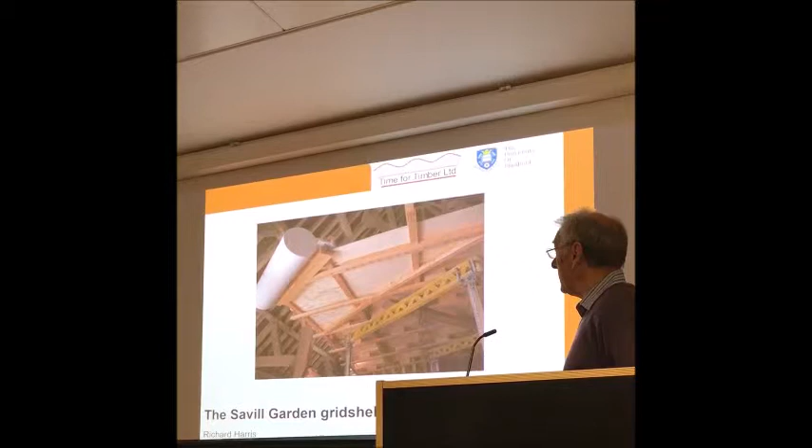One of the really significant things that came out of this was that this is spruce plywood, and the cost consultant wouldn't contemplate us using birch plywood. But when the client saw the spruce plywood, they immediately said, I don't like that. And we said, oh, you could use birch plywood, which is much stronger, so much easier to use from a structural point of view. Just that one thing alone was very beneficial.

So here are the trees being harvested, cut into length, sawn into size, finger jointed off site, brought to site - almost identical to the Downland Gridshell, but actually this is the workshop for the Savill building. So being spliced together, carried out in exactly the same way.

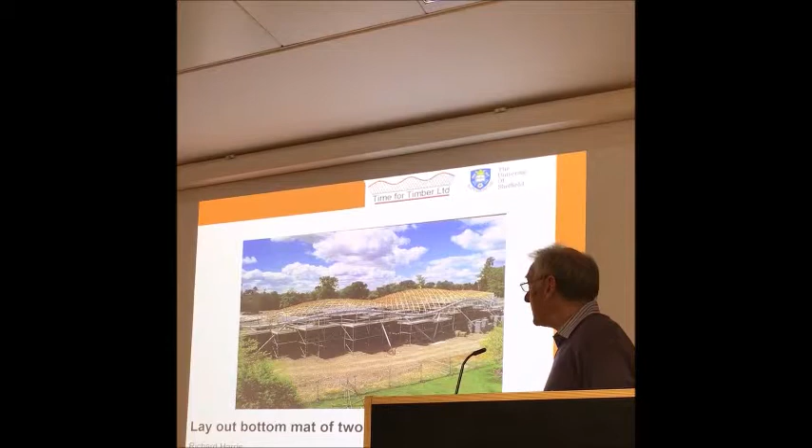Built as a single layer grid shell and bent into shape. So here's the single layer, the one timber in each direction being bent into shape, bolted to an edge tube, and then the shear blocks were applied on top of that layer, and the next two layers applied on top. That made the construction much easier.

Here's the shear block, and it meant that the layers don't actually touch one another. It gives even more structural depth and gives a more open appearance architecturally. Masses of screws, very slow construction again, but very calm and very predictable.

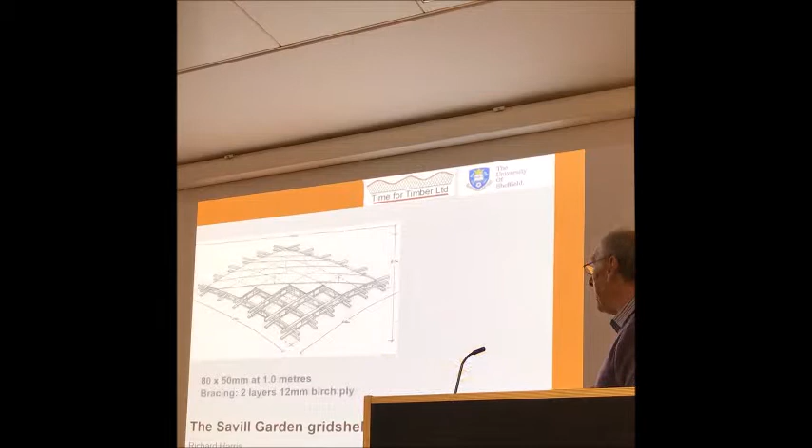Rather than on Mannheim, it's really important structurally to give the shell stiffness in plane, so you have to brace it. On Mannheim it was braced with tension cables. On the Downland grid shell it was braced with extra bits of wood put across the diagonal. On the Savill building, especially as we were able to use the birch plywood, we actually braced it with the plywood, and here's the plywood going on to brace the shell.

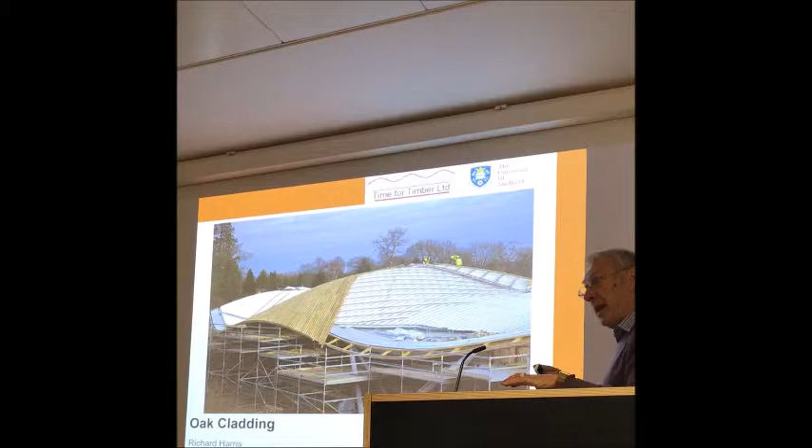And then on top of that, a rain screen of oak boards. There's a lot of discussion about what the finish should be. It has a raised seam aluminium roof over the top of the grid shell structure, but then to hide that, it has oak.

I haven't seen it for about 5 years now, but I'd be really interested because it's quite a polluted part of London, very near Heathrow Airport. But certainly initially, quite surprisingly, it gained a lovely silver colour. It would be interesting to see whether it's still managed to retain that, or whether you'd expect it to go a bit black because of the polluted air. But it actually initially went a beautiful colour, and that's what it's like inside - it's a raised, curvy plate, and architecturally it uses that, it expresses that very, very strongly.

So I think that it really does follow the competition sketches. This is a tiny structure, but it's just an example of making a shell from start to finish, starting with this woven mesh to get a form, turning that into a structural model, turning the structural model into a physical model, and then creating a very small grid shell.

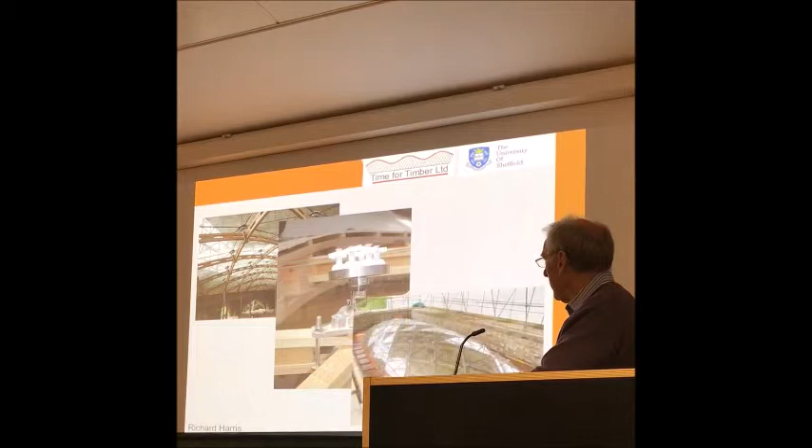In this case, using the same node detail but with an extension and putting a glass roof on it. So just showing that you can, and using double cables as the bracing system.

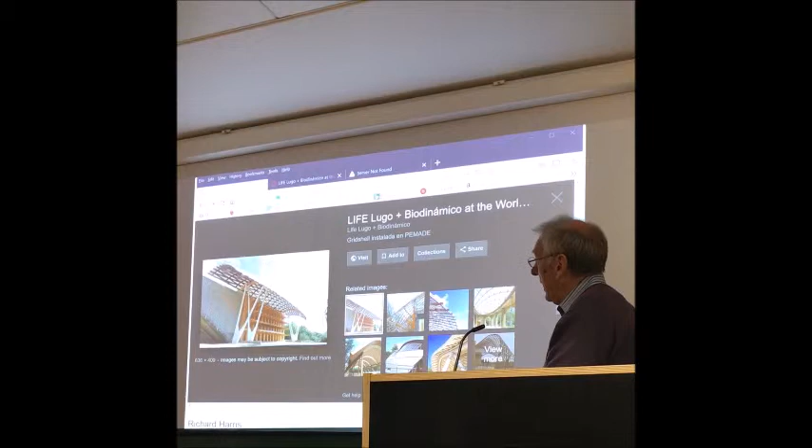The place where there's quite a bit of research going on into timber grid shells at the moment is the Polytechnic in Madrid, and I just found these images today. This is a shell that they've constructed in Lugo, but it's the engineers in the department in Madrid who provided the engineering expertise. What they've done is the culmination of quite a lot of engineering research, which I think has really moved the understanding of timber grid shells forward.

What makes this structure interesting is it doesn't have edge tubes. It has cross arches that it spans over, but they've worked to a further stage in understanding how the timber stresses. So it cantilevers forward over the top of these arches, and they've done a lot of work in developing an understanding of what the stresses are in the bent structure.

So that's it. It's a little story of turning wood into something of higher value, but it's still wood. Thank you.